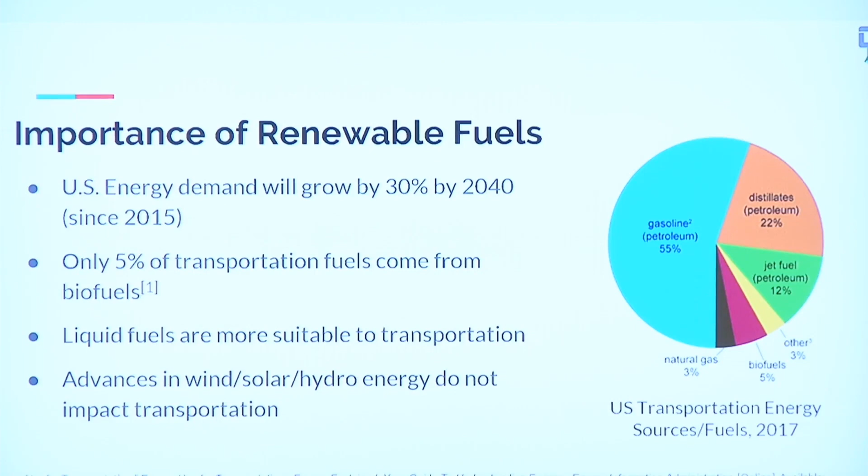Renewable fuels are becoming more and more important as the energy demand in the United States grows, and by 2040 it's projected that the energy demand will have grown by 30% since the levels we saw in 2015. Transportation is a big part of that energy demand, but only 5% of that is met with biofuels. When it comes to transportation, liquid fuels are more advantageous than a gaseous fuel like hydrogen because they're more energy dense and easier to store.

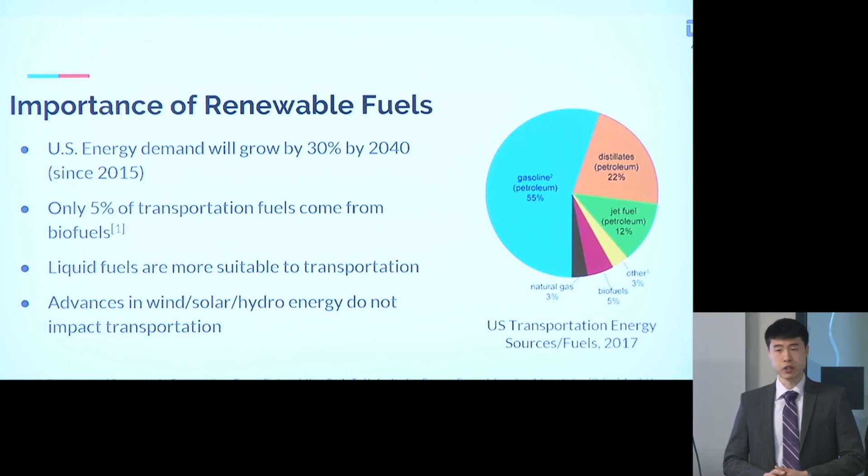It's not to say that advances in hydropower, solar, or wind are bad. They just address electrical energy production and aren't applicable to transportation. So that's why we chose to go with a liquid biofuel.

Liquid biofuels, the two most common are biodiesel and bioethanol. We chose to go with bioethanol because biodiesel is often variable from batch to batch and it's hard to characterize exactly all the hydrocarbons inside of a solution. So we thought it'd be easier to go with a single compound and really nail that down.

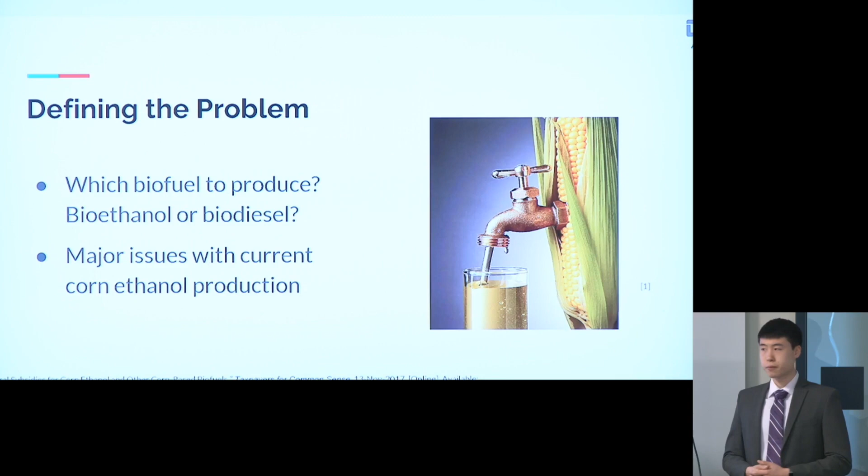When we looked into bioethanol, we found that the most common feed source is corn, but there are some underlying issues with that. One of the biggest issues is the amount of land and water resources required to grow the corn. It can lead to deforestation.

The lack of crop rotation can severely degrade the soil, making it almost unusable. It decreases the amount of food crops available because land is being used to grow corn instead of other food, and it can drive up the prices of the food that is available.

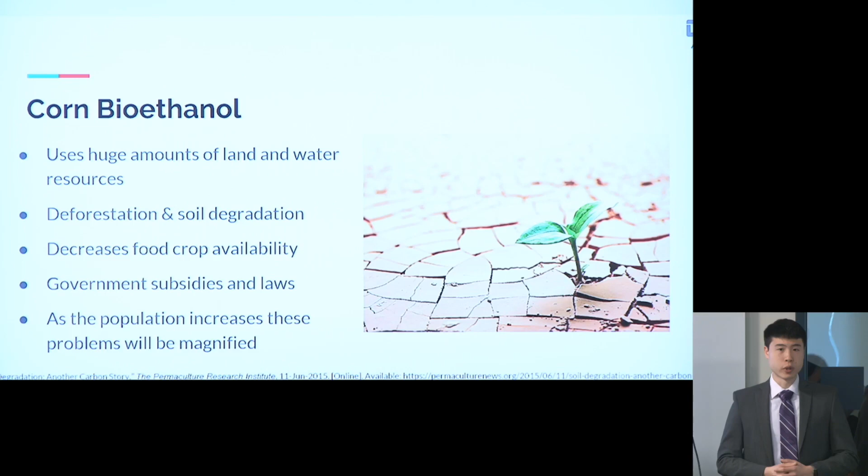We think that one of the only reasons this industry has been economically viable is because of how heavily subsidized it has been from the government and the large tax breaks. As the population grows, these problems will only increase.

So we set out to create a problem statement and asked: can we develop a process to grow bioethanol renewably that does not rely heavily on land and water resources?

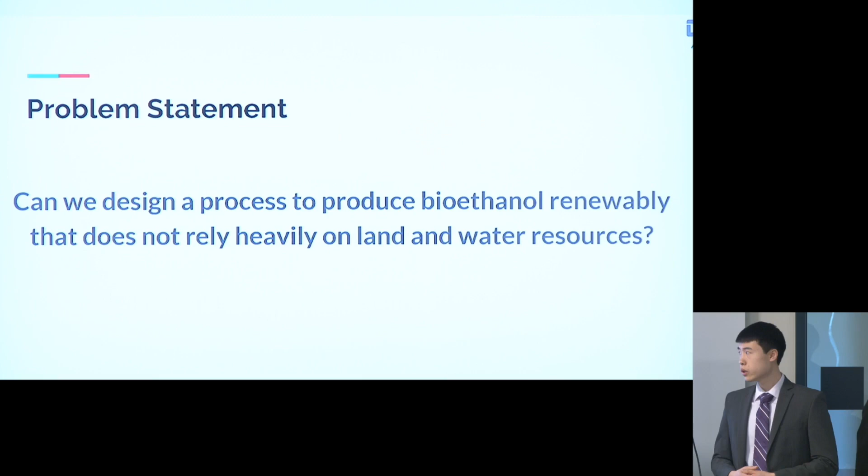Before we started designing our process, we looked into some past and present companies. One of them is Joule Unlimited. They produce bioethanol directly from cyanobacteria, but they had an outdoor process and relied on the amount of sun that reached the cyanobacteria, so they were constrained by the climate and weather.

A little bit about our initial ideas in the process design. First we had to decide whether to ferment the sugars or produce it directly. Based on the research we did previously, we decided to go with the bioethanol directly and just avoid the contamination issues. We also thought about whether to use a batch process, and this was a good option if we had chosen to ferment the sugars.

Because we could do this all in one unit op, we could grow the cells, extract the sugars, and ferment them, but we realized there would be very poor light penetration in a mixed CSTR, so we went with a continuous manufacturing process. This would also cut down on startup and shutdown costs and time, and would greatly increase the amount of light that could reach the organisms we're using, which is the most important part when trying to grow the bioethanol.

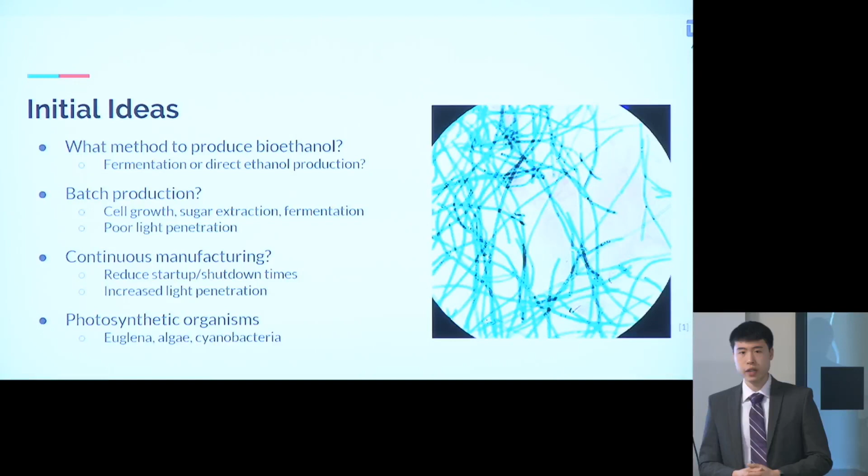So we decided to go with cyanobacteria because it is not a eukaryote like some of our other options, which means they grow much more quickly and are easier to genetically engineer.

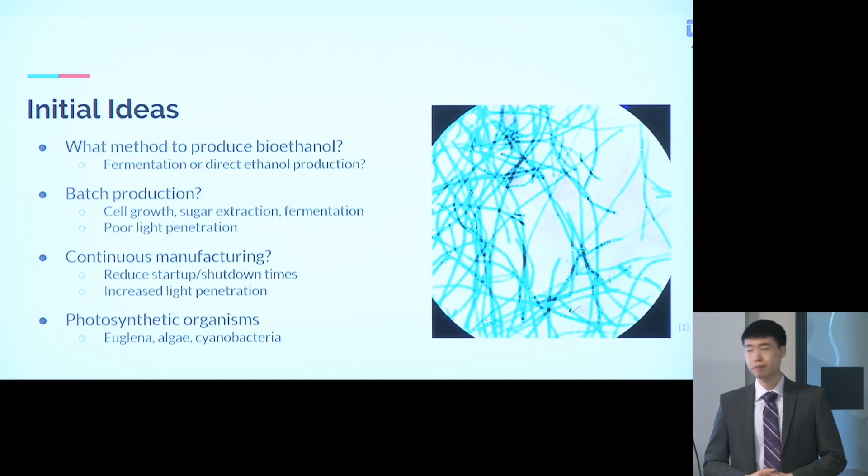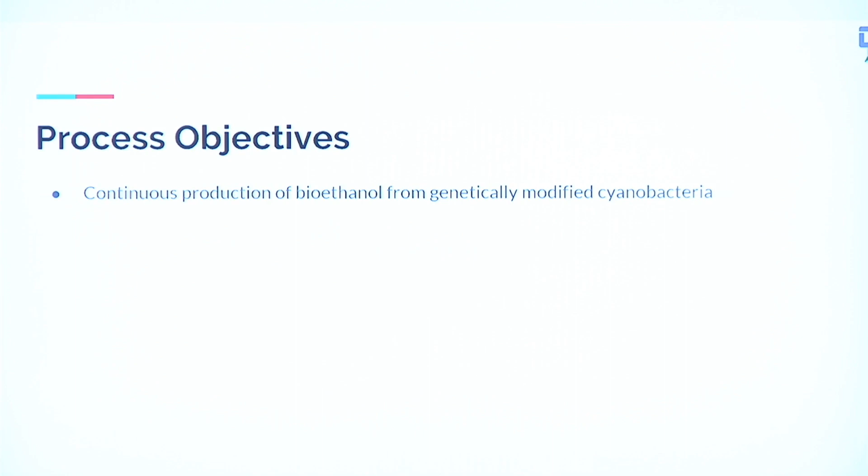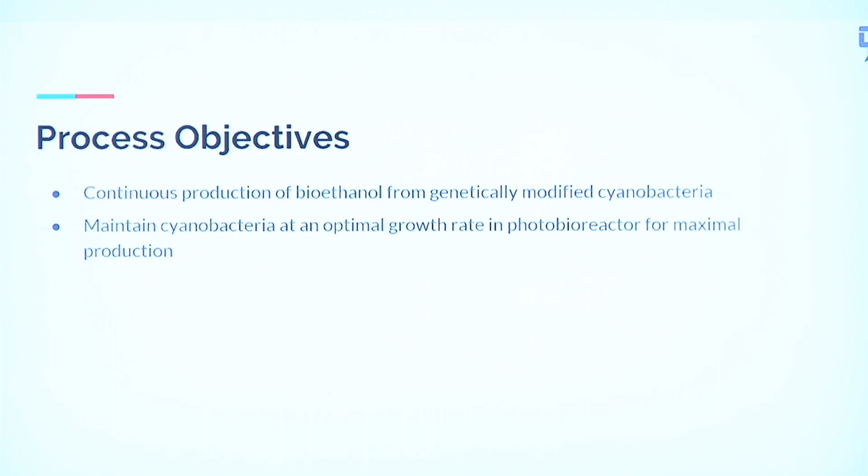This brought us to our overall process objectives. The overall objective we want from our entire process is to produce bioethanol continuously from genetically engineered cyanobacteria. In order to achieve this, first we need to culture the cyanobacteria and maintain them at an optimal growth rate for the highest amount of ethanol production possible.

At the end of our process, we want that ethanol to be at least 99.5% pure. In order to do that, between these two steps we need to concentrate the cultures and cells, lyse the cell walls to extract the ethanol, remove the cell debris and other media materials, and then separate the water and ethanol in order to purify it.

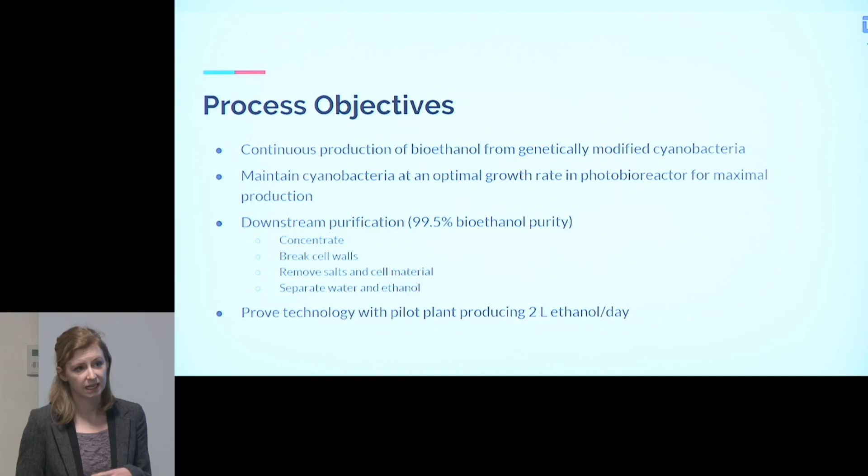Lastly, we want to prove that this process works with a pilot plant that produces 2 liters of ethanol per day, which is a good scale for us to be able to have lab space and walk-in hoods for all of our unit ops.

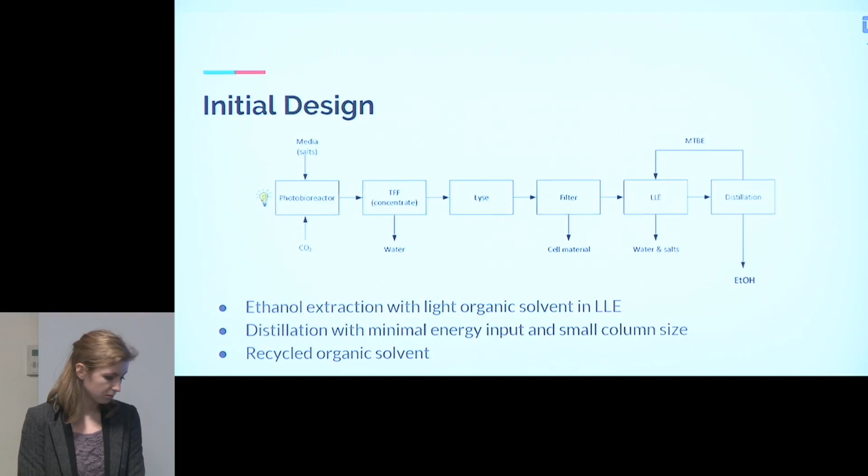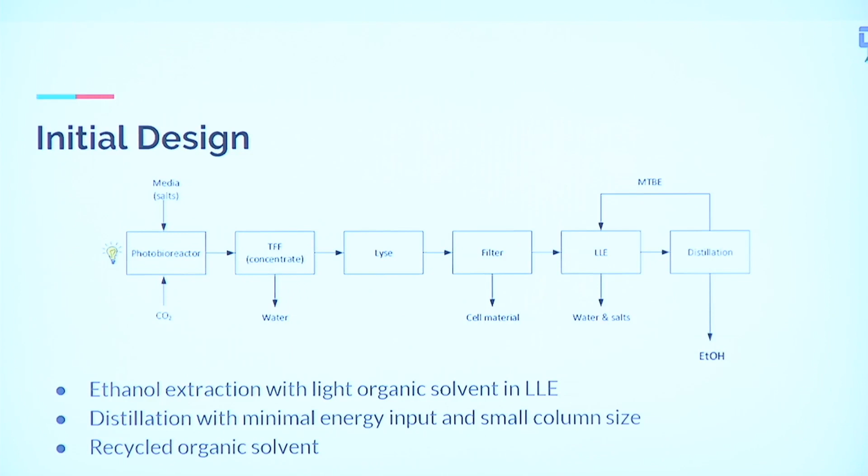So here's what our initial design looked like. I mainly want to focus on the last two blocks in this block diagram, the liquid-liquid extraction and the distillation. This was how we envisioned removing the water and media salts, and the organic coming out of the liquid-liquid extractor would go into a distillation column where the ethanol would be the bottoms product.

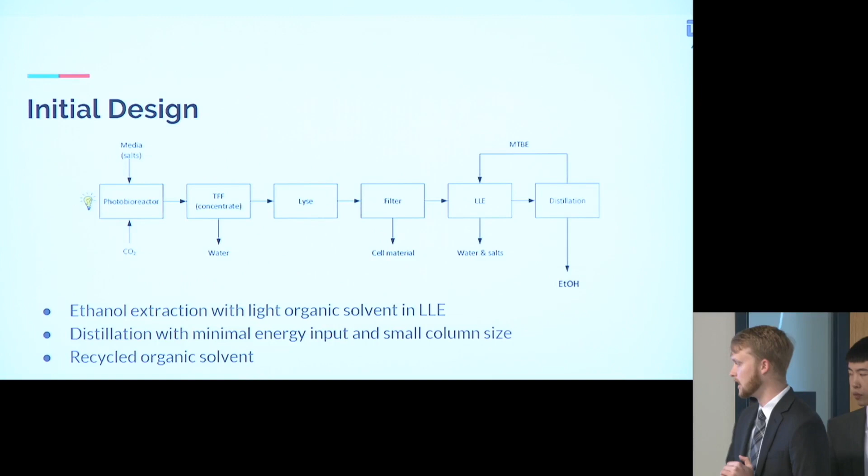Initially we thought this was a great idea because it was not going to be very energy intensive at all. We can recycle the organic solvent, and we'll use a light organic solvent in the liquid-liquid extractor.

So we immediately started modeling this in ASPEN. Just for background, our feed going into this is 90% water and 10% ethanol. We explored solvents such as methyl tert-butyl ether, methyl ethyl ketone, methyl isobutyl ketone, and a whole bunch more.

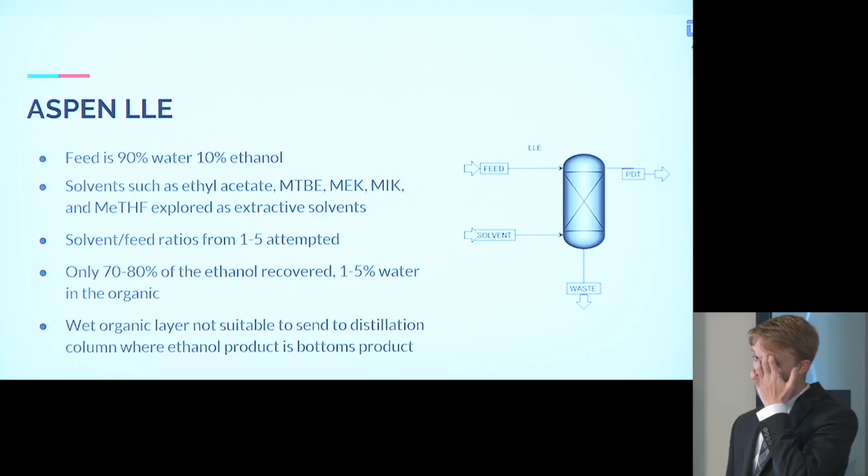We looked at solvent-to-feed ratios that vary from 1 to 5, but no matter what we changed throughout this whole modeling process, we found that we could only recover 70 to 80% of the ethanol coming into the liquid-liquid extractor, and the organic layers were far too wet, 1 to 5%, sometimes even more, water.

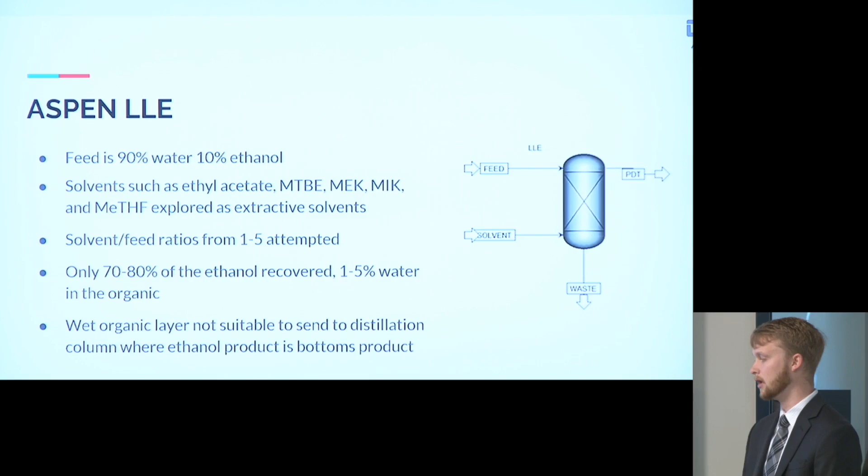So we had to do quite a bit of literature research to find something more suitable for our process. We came across an extractive distillation that uses ethylene glycol to break the azeotrope between water and ethanol.

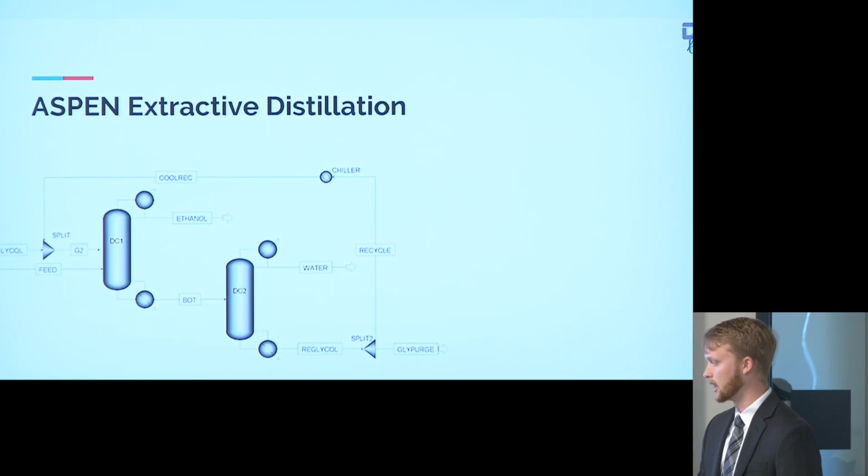To walk you through the process: the feed, water and ethanol, enters the bottom of the first column hot, and the glycol enters the top of the column cold. Basically what happens is they cross paths in the column. The ethanol comes out the top, and the water and glycol come out the bottom.

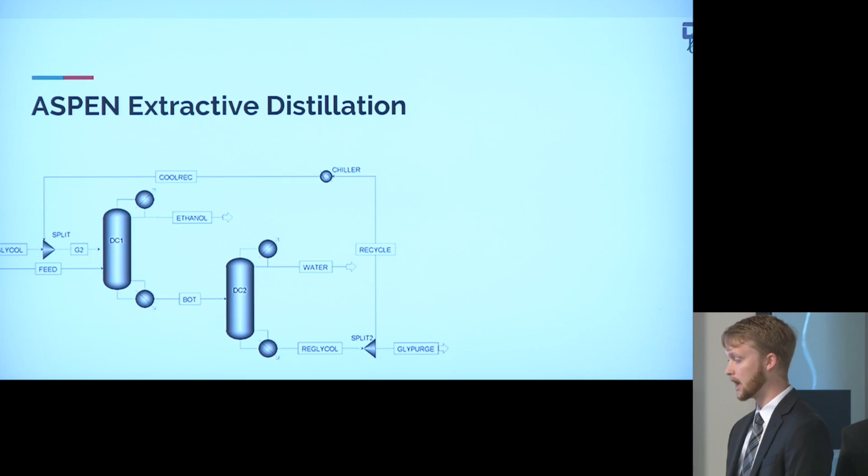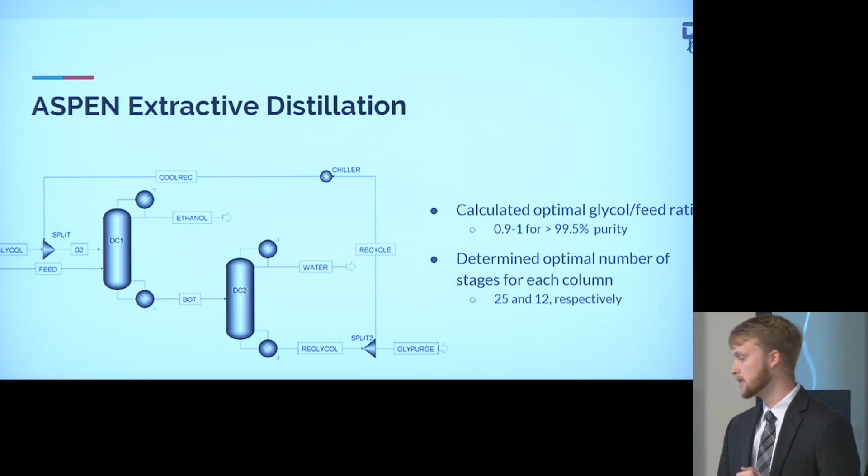The whole purpose of the second column is to recycle the glycol. When we modeled this, we were able to get 99.5% purity for the ethanol, which is the industry standard, and we determined the optimal number of stages for both columns, which is 25 and 12 respectively.

Now that we have an idea of how we can purify our ethanol and water, I want to walk you through our final design PFD. It starts with a photobioreactor, as I showed before. After that, it gets concentrated, a lot of water is removed in the first tangential flow filter.

Quickly, a tangential flow filter is a membrane that water flows tangentially across, and a pressure difference drives most of the water through the membrane, which concentrates it. After that, the cells will be lysed and the ethanol will be released into the solution in a lysis step. Then it will be followed by another TFF to get rid of the cell debris.

Now that we don't have the liquid-liquid extractor, we need something else to remove the media salts from the photobioreactor. So we will be using an adsorption column to get rid of the heavy metal anions and cations. And then finally, the extractive distillation, which I mentioned before.

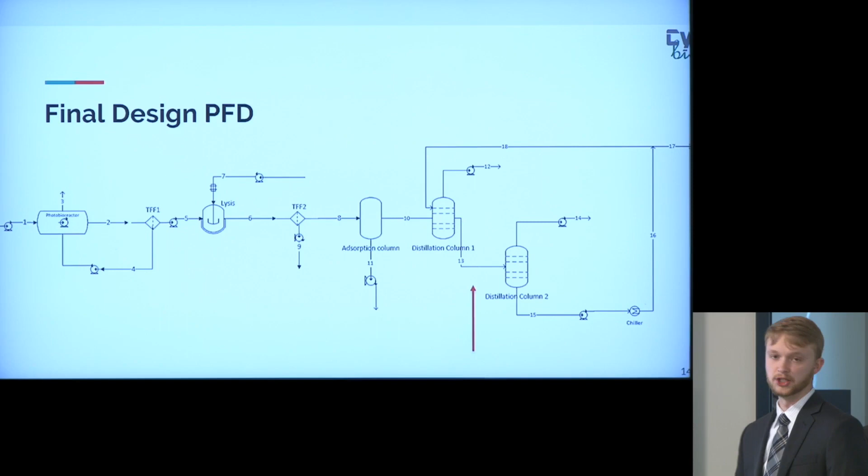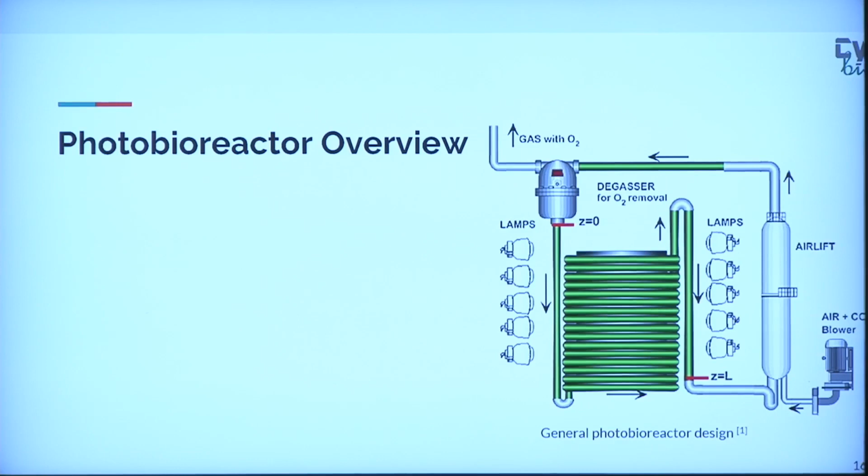Now we're going to get a little more in depth on the photobioreactor. Just a brief walkthrough of what a typical photobioreactor looks like: it utilizes clear tubing surrounded by lamps for a light source. The airlift is where there's a liquid-gas phase separation, where air and carbon dioxide can be bubbled through the solution. There's an outlet for the gas, and also a recycle pump for the aqueous solution.

For our specific pilot plant, we're going to use 5 centimeter diameter tubing, which would end up being less than 50 meters of total length at the pilot scale. At the moment, we've envisioned what we're calling a coiled wall configuration—imagine tubing in a flat stack that goes back and forth, so you can have lights on either side, with light penetration from multiple angles.

The lights are going to be red shifted for optimal cyanobacteria growth, and it's going to operate at near ambient conditions: low temperature, 1 bar pressure. While we are explaining a batch recirculation system in this picture, this process is still fully continuous because there's an overall inlet and exit flow.

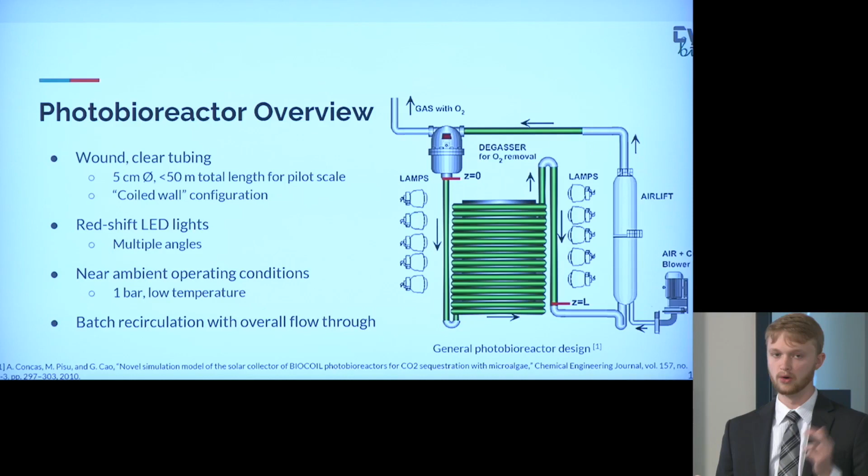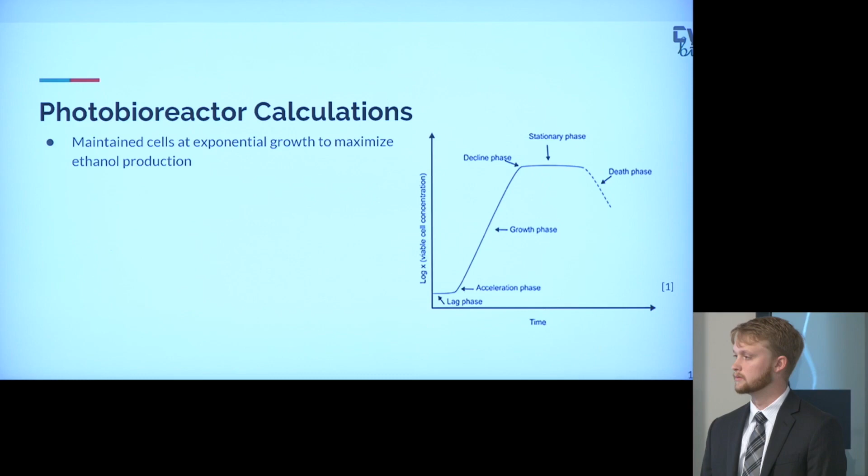Next we're going to talk about the calculations and the math we did using the photobioreactor to model it. On the right you see an image of a batch growth curve—this is how cells grow in a batch reactor.

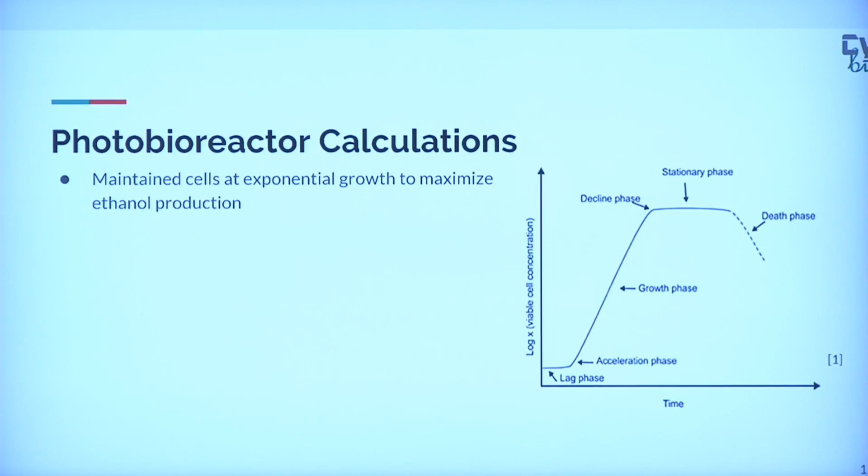You can see the part with the really high slope, that's the exponential phase of cells where they grow at the maximum growth rate possible. In a continuous bioreactor, instead of seeing this growth curve, we can freeze the cells at one point in time along this growth curve.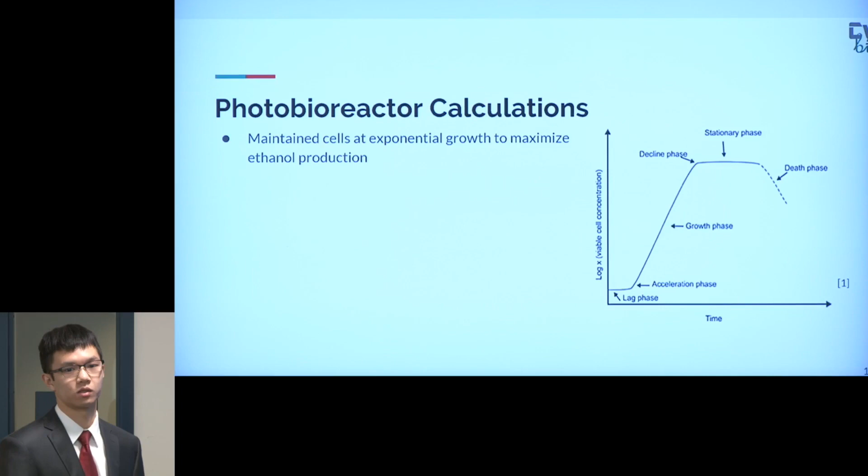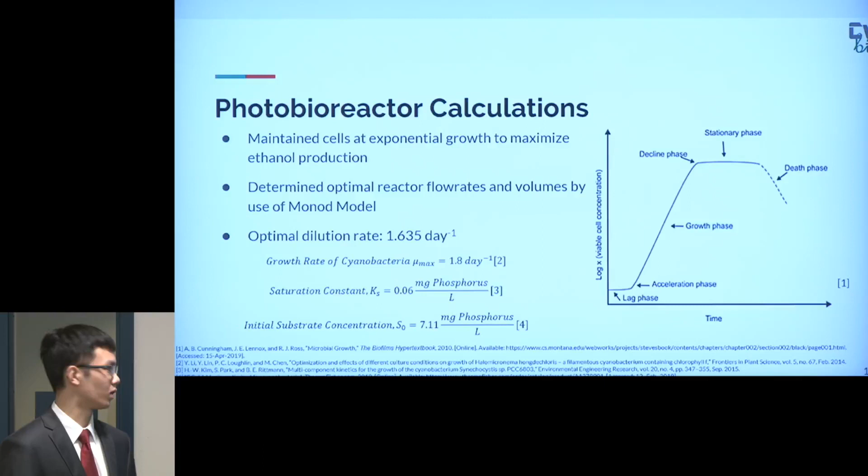For our bioreactor, we're going to keep the cells at the maximum possible growth rate so we produce as much ethanol as possible. We used the Monod model and solved those equations to get the optimal flow rates and volumes for our bioreactor, and we found the optimal dilution rate to be about 1.6 per day. We got kinetic parameters from the literature to figure out how to get these values, like dilution rate.

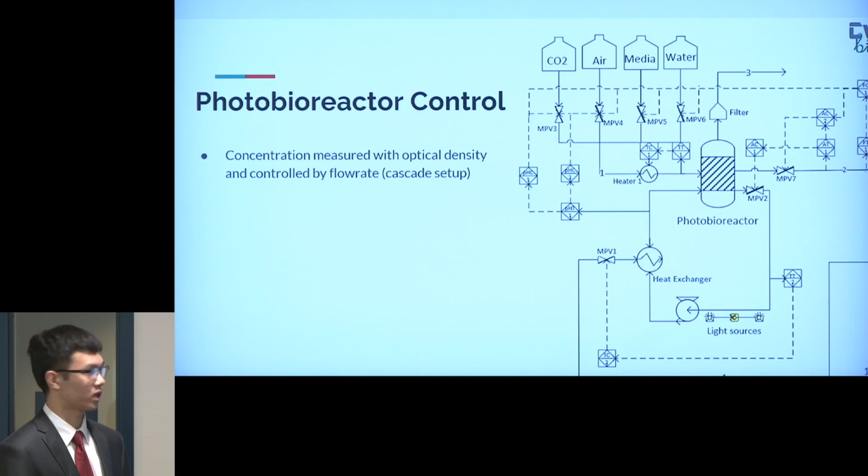There's a lot of control systems in our bioreactor. Here's just a snippet from our P&ID. You can see we have 4 inlets: carbon dioxide, air, medium, and water, which are needed for the cells to grow. And we have a lot of controls on every stream going in and out.

The main parameter we're considering is the concentration in the photobioreactor. This makes sure we have enough cells growing so we get the right amount of ethanol coming out. We're using optical density as a measurement, and it's controlled in a cascade setup.

Since we have a lot of light sources on the tubing that Alex described earlier, there may be a lot of heat generation from that, so we have a heat exchanger to make sure the bioreactor stays at the right temperature and there's no overheating.

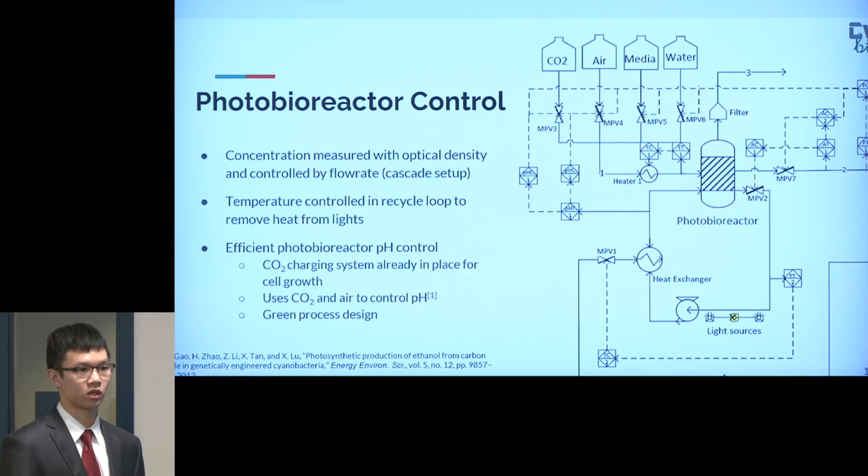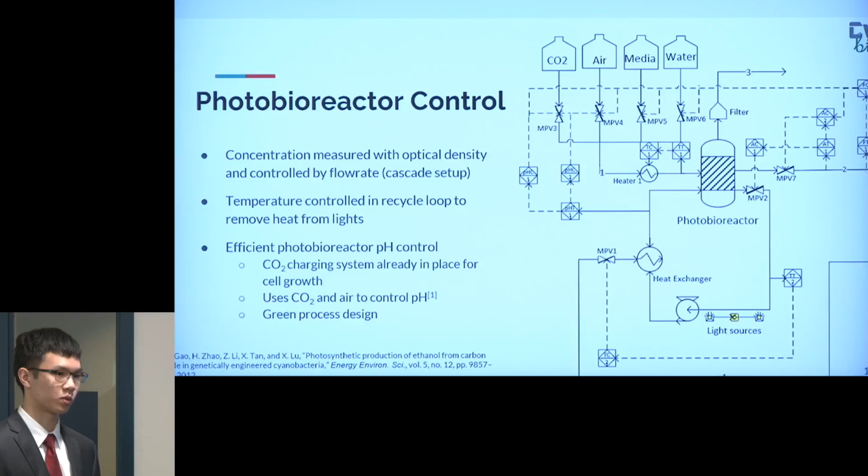The pH is another important concern, so we're controlling the pH in the reactor by using the carbon dioxide and air, which are able to buffer the pH a bit. These are really good for our process because we already need the carbon dioxide and air to grow the cells, so by using the same components to control pH, we don't have to add any additional acids and bases to our process.

Next, we're going to talk about the downstream operations, again, about after the reactor.

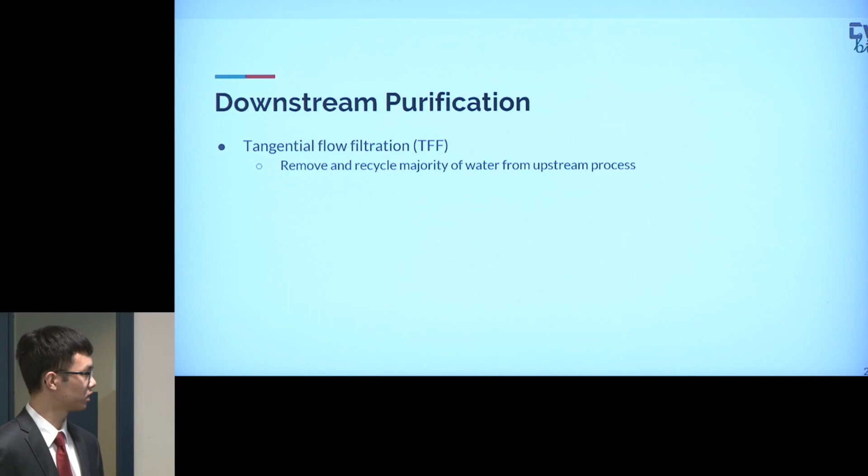So we have the tangential flow filters. The main purpose of these is to remove a lot of water from our process. This allows us to recycle the water, minimize the water requirements in our process, and we end up recycling over 90% of the water. Our cell lysis tank is where we rupture the cell walls, break them apart, and get the bioethanol out of the cells and into a solution.

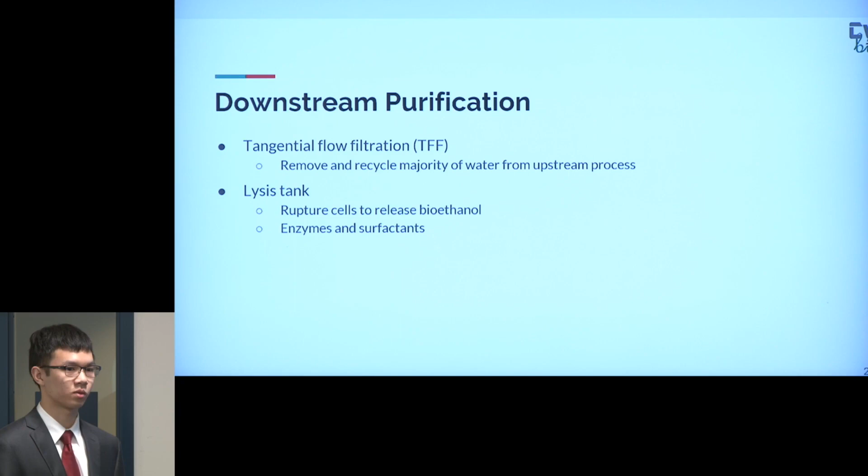Our adsorption column can be used to remove salts, and while we don't have a lot of salts in our process, it's still a good idea to get rid of them before the distillation columns, to make sure nothing gets clogged. We surveyed the literature and found a lot of different options we'd want to consider, but right now we're considering using a modified cellulosic lignin packing.

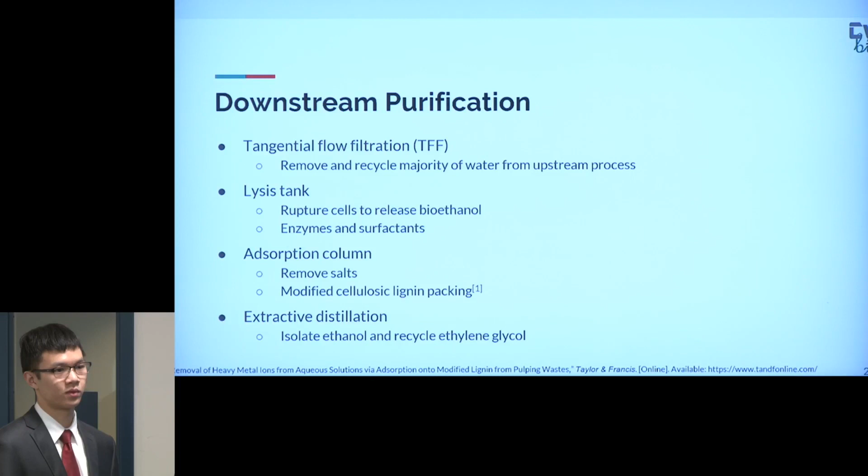And we have our final step, the extractive distillation, where we can get the bioethanol to the right purity and recycle all of our ethylene glycol.

Here's our entire P&ID. It's pretty hard to see from here, but we'll just point out a few key things you haven't seen already. This arrow points to the fact that we have a lot of recycle streams in our process. Here we're recycling the water back from the TFF into the bioreactor, and that saves 90% of the water, meaning we don't use that much water to grow our cells.

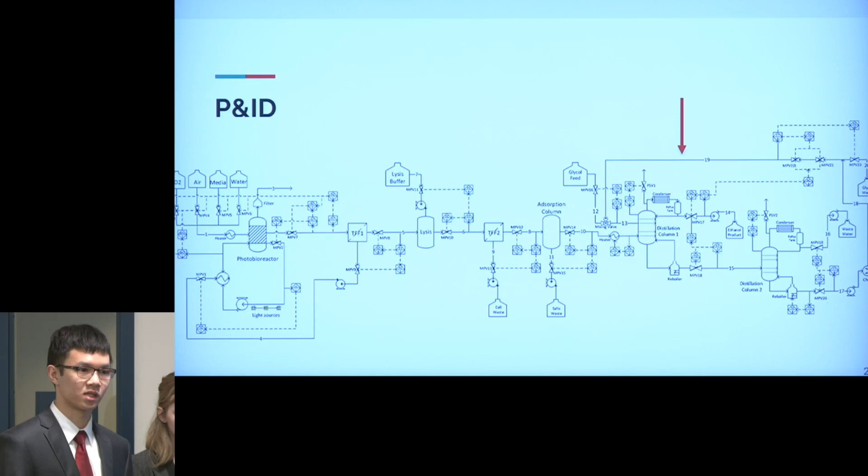Here we have the recycle stream for our ethylene glycol. Ethylene glycol is the most hazardous compound in our process. We want to make sure we minimize its use, and by recycling almost 100% of it, we really prevent ourselves from using too much of that kind of chemical.

Here we highlighted that we have redundancies and safety built into our system. On the ethylene glycol stream, which is the most hazardous stream, we want to keep that under the most control. We have 2 valves in series with each other to make sure that if one valve fails, the other one's still there to keep everything in safe operation.

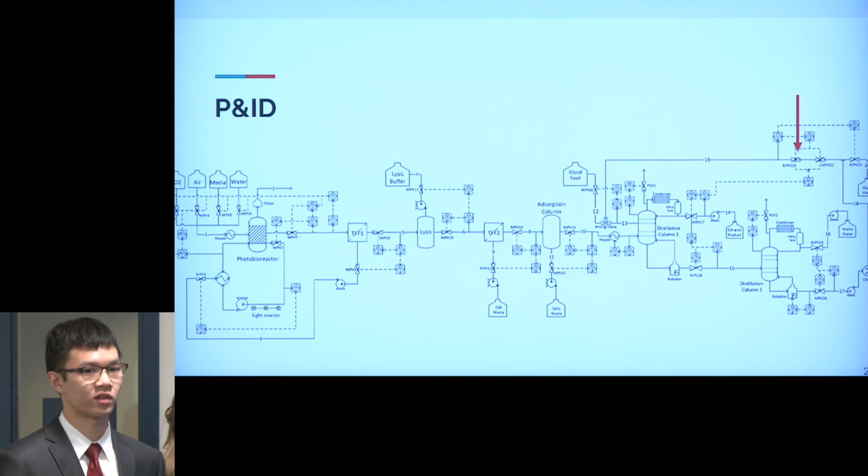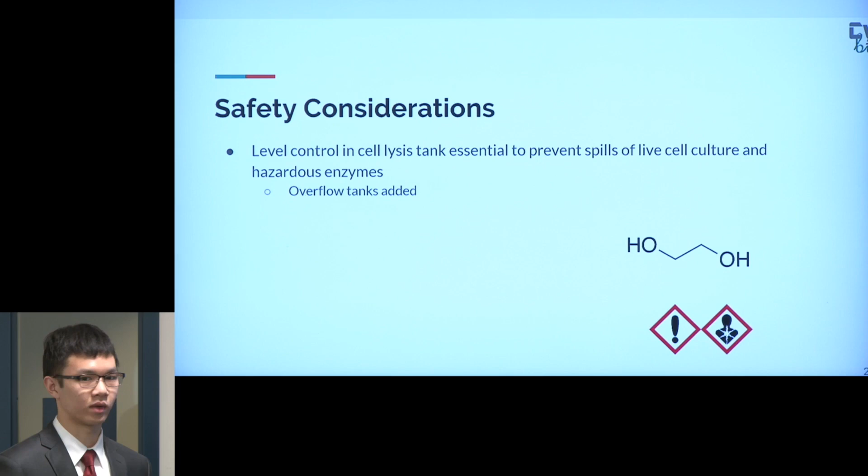For safety considerations, the first one we have is level control on our cell lysis tank. We don't want to be spilling live cell culture all over the place, and there's going to be some enzymes in there that could break down cells. We don't want to get those everywhere, so we have level control to make sure it doesn't overflow, and we have containment tanks to make sure nothing gets lost.

We're using fail-open and fail-close valves in strategic places in our process to make sure nothing gets out to where it shouldn't. We have fail-close for inputs to the system so nothing else can go in if something goes wrong, and fail-open on outlets of the system to make sure everything drains out of our process.

We have redundancy in valves and control systems like mentioned on the previous slide, and we've been reusing and recycling our toxic materials as much as we can so we minimize the use of that ethylene glycol.

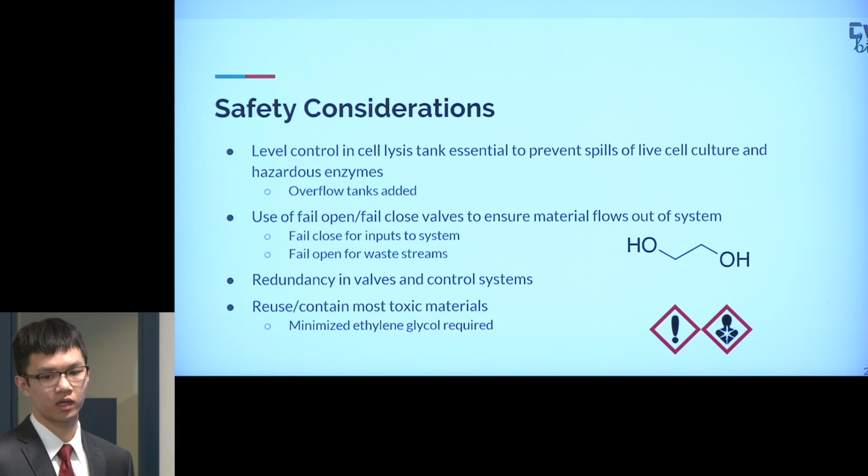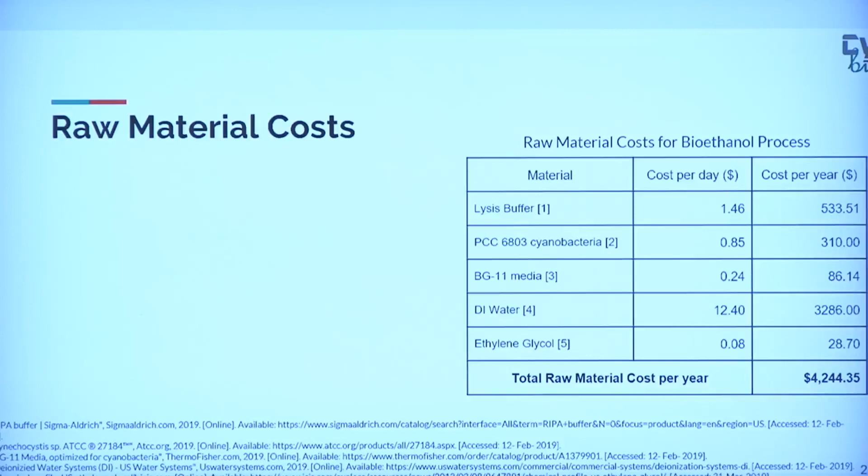Moving on to the economics aspects of our process, for raw materials we mainly have the components that make up our cultures, the lysis buffer to break the cell walls, and also the ethylene glycol for our distillation system.

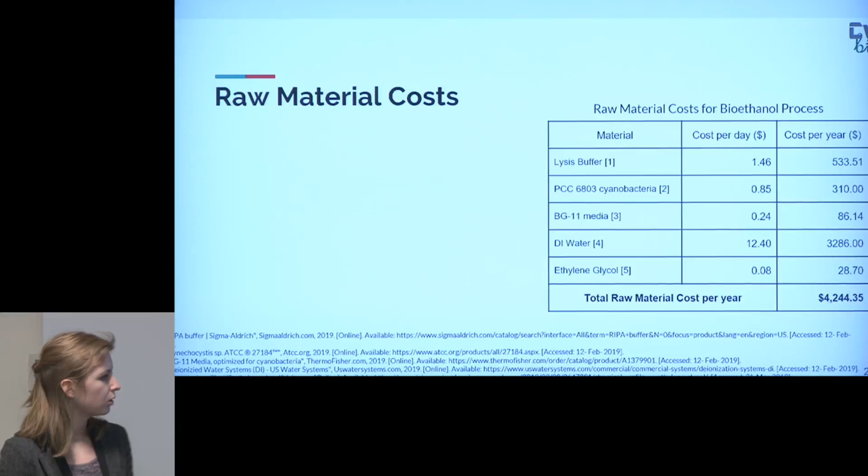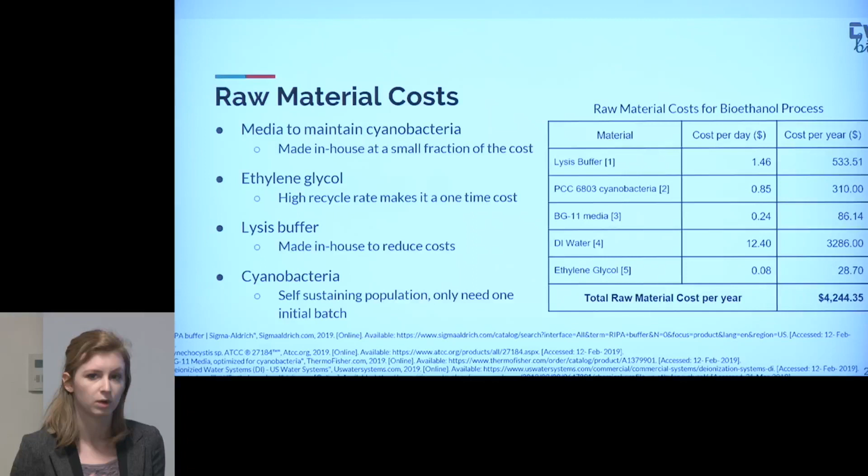For both the media and the lysis buffer, we were able to find recipes online so we could make them in-house, which reduced the cost significantly. For ethylene glycol, the recycle rate is high enough that it's essentially a one-time cost. The cyanobacteria, being a self-sustaining, growing population, is also only a one-time cost. So that brings it to a very low cost of only about $4,200 a year.

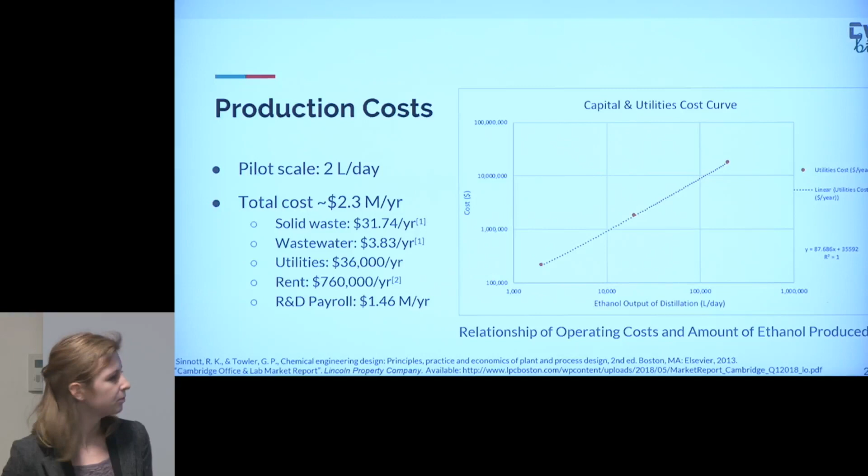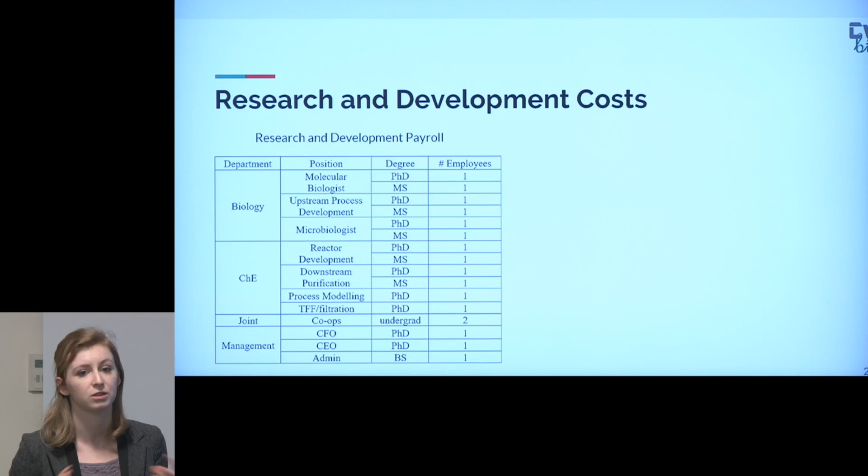Why is that payroll so high? Because we decided the most important part of this project would be the team of people developing the technology over a 5-year project. So we came up with positions in our biology and chemical engineering departments, and decided that for the first 2 years we'd hire 1 employee per position while ramping up, and for the remaining 3 years as we finish the process, we'd hire everybody on this payroll.

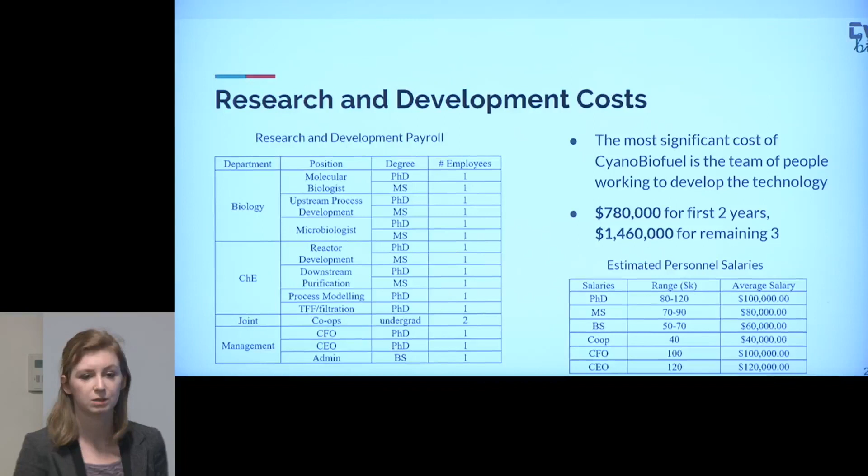The capital costs are a lot lower, again because we are a small pilot plant. We took all the unit operations and used the factorial method from the Towler textbook to estimate installation costs, then did a stage 4 capital cost estimate on these. We also included a couple non-unit operations, such as the autoclave and an incubator, because they're important for sterilization of the media and quality control, and are relatively significant costs compared to everything else. This comes out to about $137,000 for our capital costs.

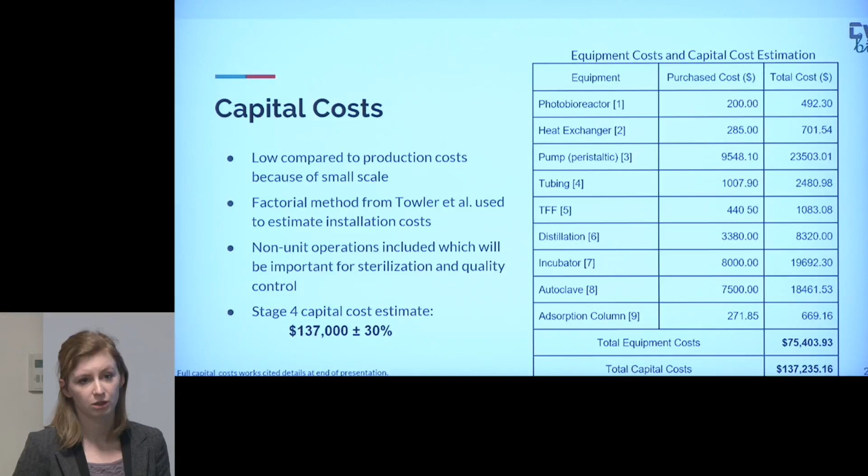Now we're going to talk about how we're going to market our product and generate revenue. We have a few different options. We can potentially sell this IP to a big oil company interested in biofuels, or sell it to a corn bioethanol plant interested in alternative feedstocks. Partnering and licensing are still options as well. However, for continuing this project, we decided our primary goal would be to sell to a big oil company.

That leads us to the very difficult part of this project: the valuation of the intellectual property. We started by selecting 3 companies that are all publicly traded and only make corn bioethanol. We took their market cap divided by the total number of shares to get the company's total value, then divided that by the gallons of ethanol they produce to get a dollars-per-gallon number for each of these 3 companies.

We averaged these 3 numbers to get about 50 cents per gallon, and theorized that a mid-sized company, falling right in the middle of the three companies' outputs, would produce 500 million gallons per year. So their hypothetical worth would be $260 million. For our pilot IP, considering the significant cost, time, energy, and resources needed for scale-up, we felt that 1/10 of that future value is what the pilot IP is worth right now. So that's a valuation of $26 million.

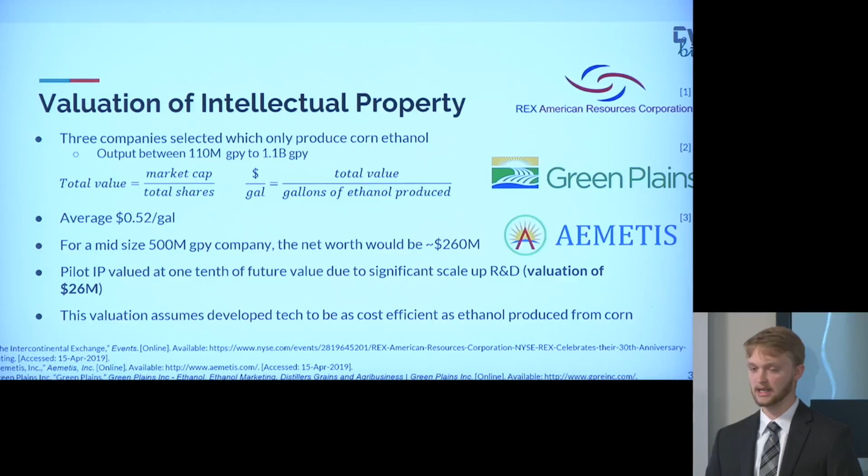Now, this valuation has one giant assumption in it, and that assumption is that our developed technology is going to be as efficient as the ethanol produced from corn, and that's really something you can only find out in a pilot plant. Because of the nature of our project, we won't generate revenue for the first 5 years as we're developing this process and technology.

We'll need an initial investment of about $10 million to cover the production and capital costs we discussed before. After this 5-year R&D phase, we'd hope to sell the IP for the $26 million that Alex talked about beforehand. After these 5 years, with a standard 12% interest rate, we found our net present value to be about $15 million.

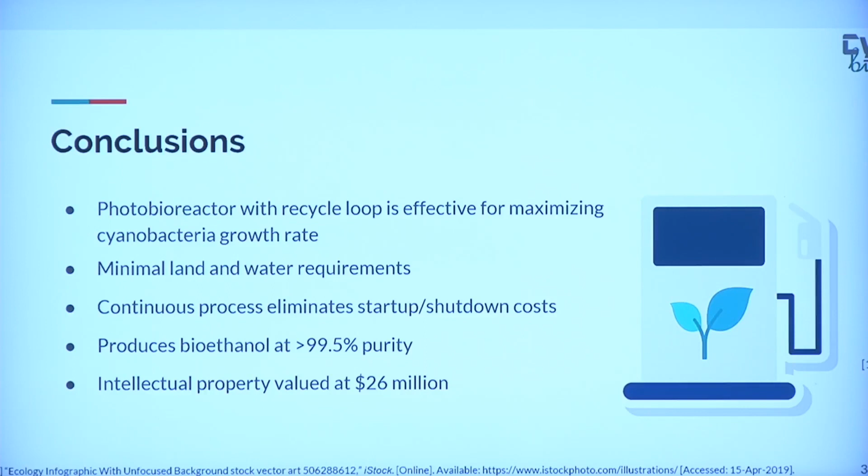So what are the conclusions we can get from this presentation? We found that a photobioreactor with a large recycle loop is effective for maximizing the cyanobacteria growth rate that maximizes ethanol production. It minimizes land and water requirements since we recycle so much water, and we are an indoor process, which has advantages over corn, which takes up so much agricultural land.

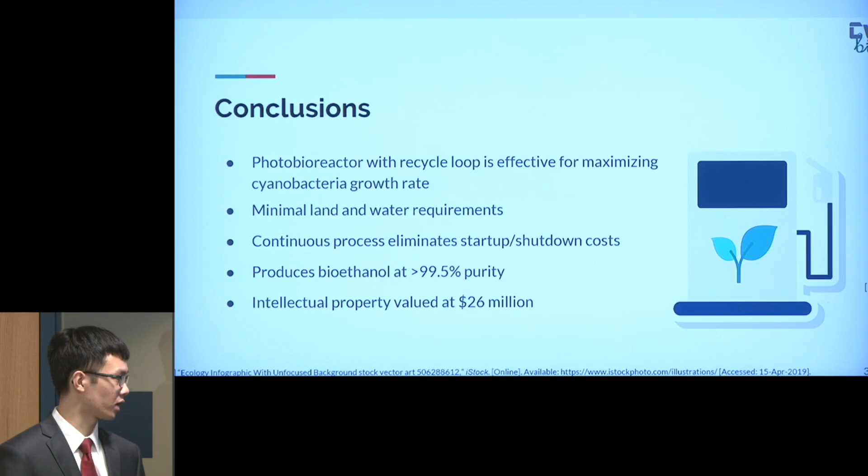It's a continuous process, so it eliminates high startup and shutdown costs. A batch system may take weeks to grow the cells for the cell culture, but we don't have to do that. We're able to produce bioethanol at 99.5% purity, which meets the specification for fuel. Our intellectual property is valued at $26 million.

For future improvements to our work, we have a lot of ideas for improving the efficiency. We can improve the ability of the cyanobacteria to produce ethanol through more genetic engineering work. This will make it more efficient, make the bioreactor faster, and get more fuel.

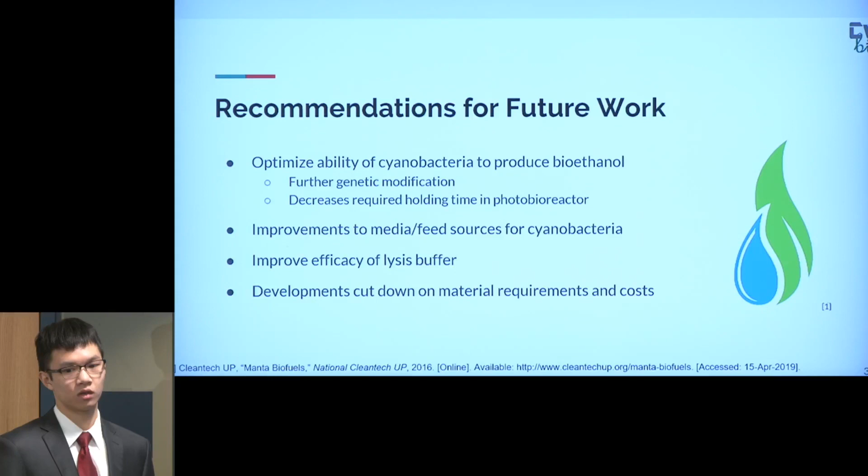We can improve the media and feed sources for the bacteria, which will also improve the yield from our bioreactor. We can improve the efficacy of the lysis buffer to make sure we're really breaking every cell apart to get all the fuel out, not losing anything in the waste stream. Overall, these improvements together would reduce the material requirements of our process and reduce costs, making us more profitable.